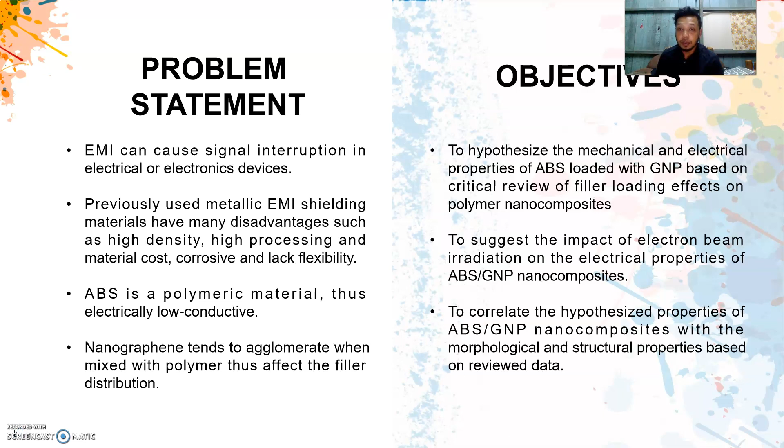Now scope. Firstly, ABS is used as a polymer matrix and graphene nanoplatelets as nanofiller. Various amounts of graphene nanoplatelets, 0.3, 0.5 and 1.0 weight percent, will be used. The samples are prepared by mixing and compounding GNP and ABS polymer using a single screw extruder to produce nanocomposite sheet. Next, the sheet will be cut into the standard specimen.

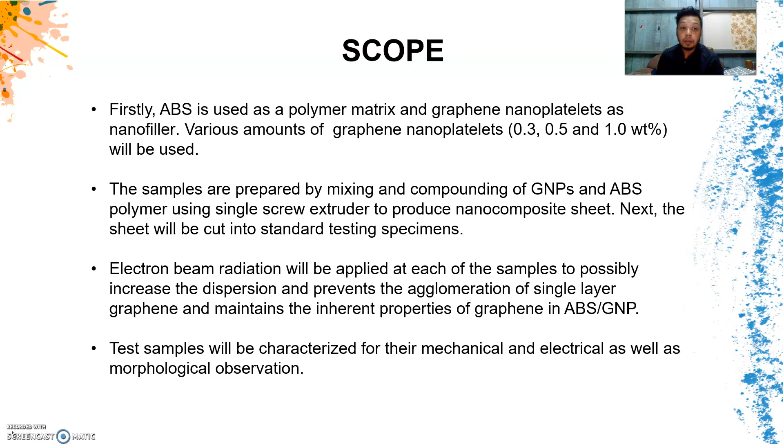After that, electron beam radiation will be applied to each sample to possibly increase the dispersion and prevent the agglomeration of single layer graphene and maintain the properties of graphene in ABS and GNP. The test samples will be characterized for their mechanical and electrical properties as well as morphology observation. For literature review, I take two journals from Mohd Bijarimi and Vidakis.

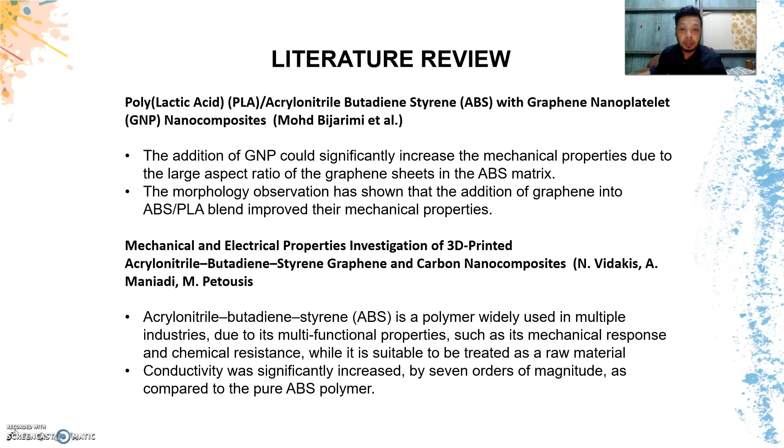Now, methodology. First, I start with mixing ABS powder and GNP powder by using a 3D mixer with speed of 60 rpm for 1 hour. After that, the mixed powder was spread on a tray and dried in the oven at 90 Celsius for 1 hour. After drying, blending was done using a single screw extruder machine with feeding zone 180 Celsius, melting zone 180 Celsius and metering pumping zone 160 Celsius.

Then we compress the composite using hot press molding to get the sheet at temperature 190 Celsius, pressed for 1 minute 30 seconds with pressure 700 psi. After that, to get the sample, the sheet will be cut to standard specimen ASTM type 4. Then test the sample using tensile test to get mechanical properties such as tensile strength, Young's modulus, and elongation percent.

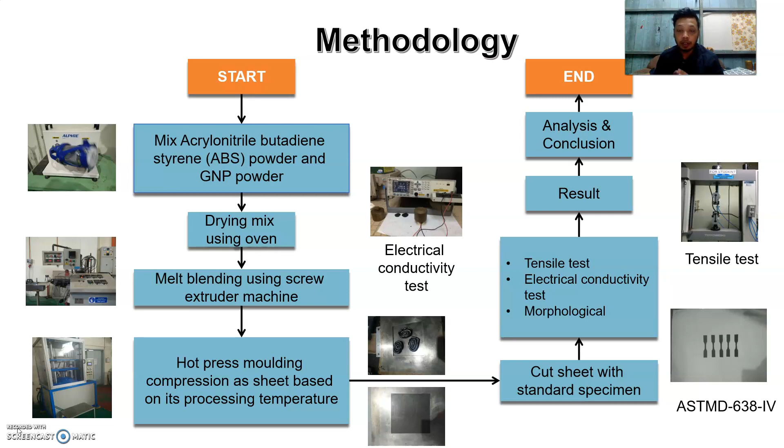For electrical properties, I use an LCR meter to test electrical conductivity. And for morphology, I use scanning electron microscopy, SEM. After that, I will get the result, and the result I will explain in the next slide. Okay, this is the formulation of the experiment of GNP-based ABS composite.

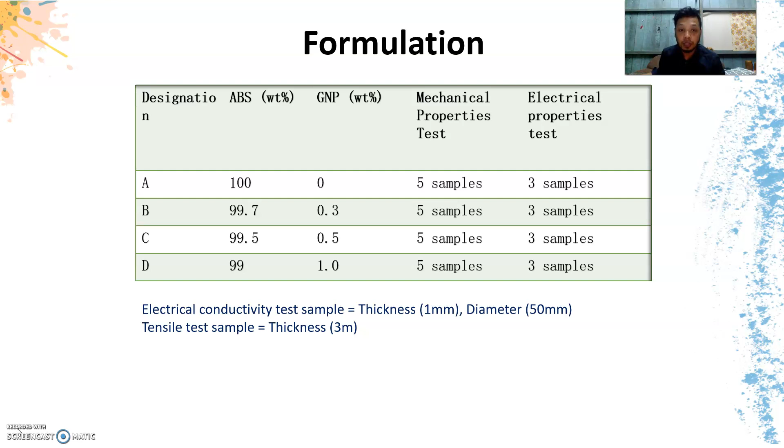As you can see, for graphene I use 0.3, 0.5 and 1.0 weight%. Okay, now I will explain my results and discussion. First, these results are projected results and outcomes based on a critical review of various previous data.

Okay, now this is the expected result for the mechanical properties for tensile strength. As you can see, the tensile strength only slightly increased at 0.3 and 0.5% GNP. As the amount of GNP is increased to 1%, tensile strength shows a decrease in value.

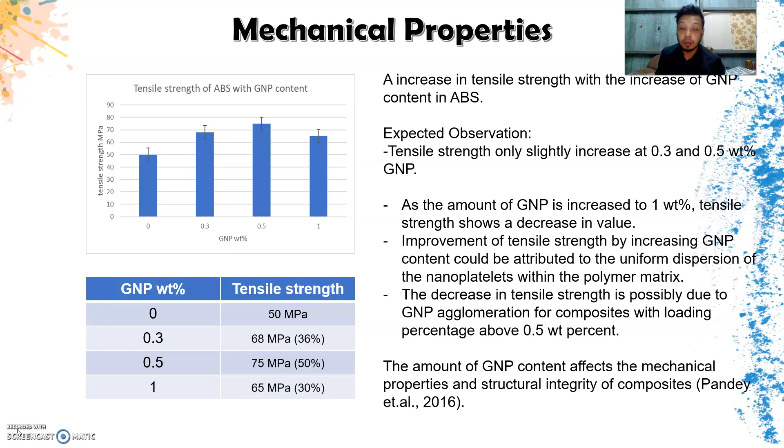The improvement of tensile strength by increased GNP content can be attributed to the uniform dispersion of the nanoplatelets within the polymer matrix, and the decrease in tensile strength is possibly due to GNP agglomeration for composites with loading percentage above 0.5 weight%. Next, we go to the expected result for percentage elongation.

As you can see, the chart pattern is increased at 0.3 and 0.5. After that, at 1.0 weight% it shows a decreased value. Elongation at break decreases with the addition of GNP. The decrease in the percentage of elongation can be attributed to the effect of GNP. The lower percentage elongation suggests a more brittle characteristic.

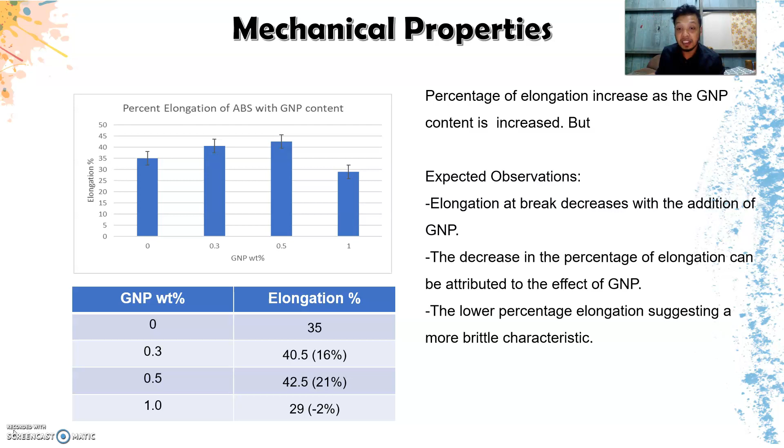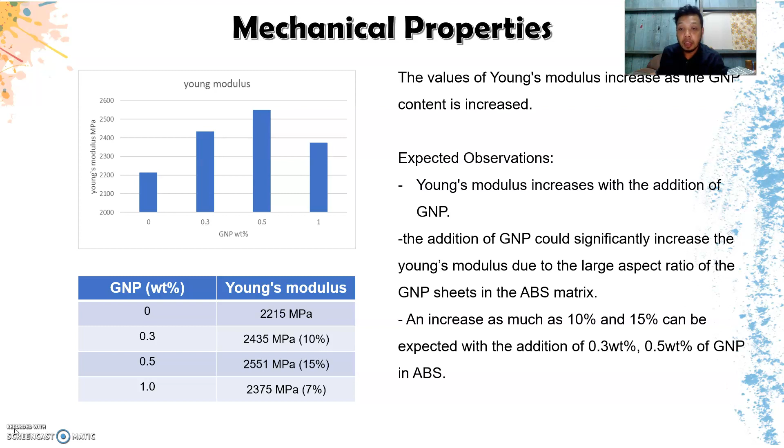The addition of GNP could significantly increase the Young's modulus due to the larger aspect ratio of the GNP sheets in the ABS matrix. Increases as much as 10% and 15% can be expected with the addition of 0.3 weight% and 0.5 weight% of GNP in ABS.

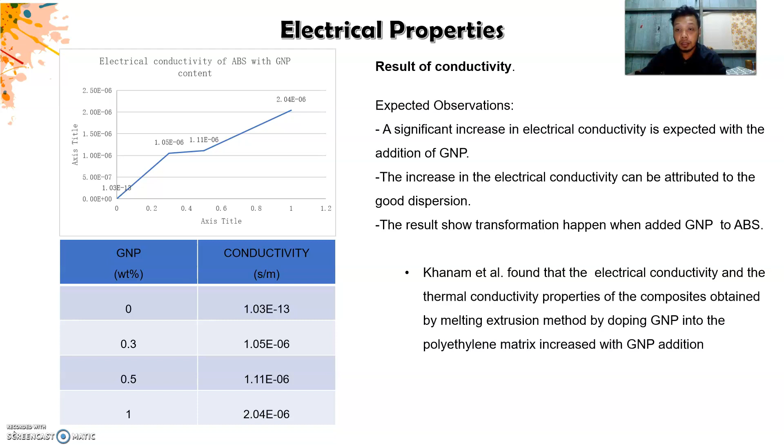Now, we go to the expected result for electrical properties. As you can see, a significant increase in electrical conductivity is expected with the addition of GNP. The increase in the electrical conductivity can be attributed to the good dispersion. The results show a transformation happens when GNP is added to ABS.

By increasing the magnitude of EB radiation on the ABS/GNP nanocomposite, it will improve the dispersion of the graphite platelets, thus achieving higher electrical conductivity. Reason: EB irradiation will reduce the agglomeration of GNP in the ABS composite and help GNP to disperse.

For morphological analysis, morphological and structural properties of ABS based on review data. It can be observed that the structure changes drastically after processing; larger polymerized domains and a smaller number of graphene agglomerations can be seen. Regions with formed polymer microfibers are present in the fracture area of the printed ABS/GNP sample, figures E and F, indicating a weak connection between graphene and polymer matrix, leading to ductile fracture of the specimen.

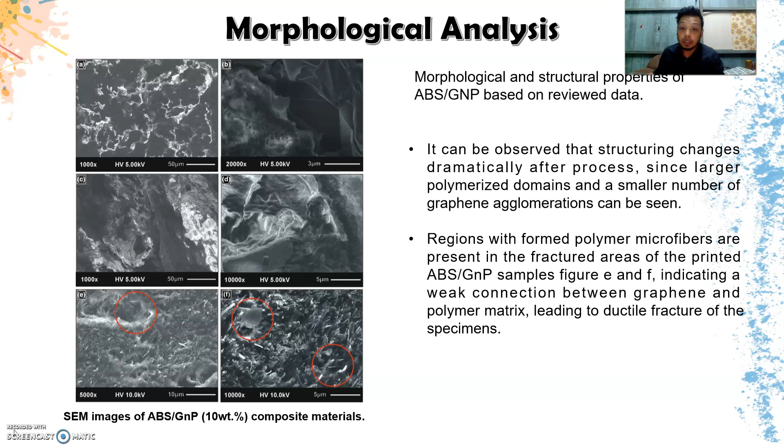Okay, for conclusion, it is suggested that the incorporation of GNP into the ABS matrix increases the mechanical strength of the polymer. Tensile strength decreases with loading percent above 0.5 weight%. Next, percentage elongation of ABS shows an increased pattern when GNP is added. The decreased percent elongation means GNP made the composite more brittle.

Besides that, electrical conductivity is significantly increased with GNP addition. The addition of large amounts of graphite greatly affects the mechanical and electrical properties of ABS. Lastly, EB irradiation is effective to improve the electrical properties in the ABS/GNP nanocomposite.

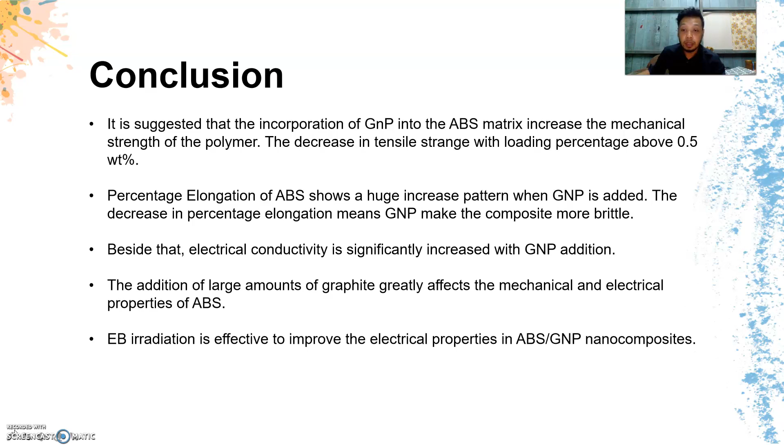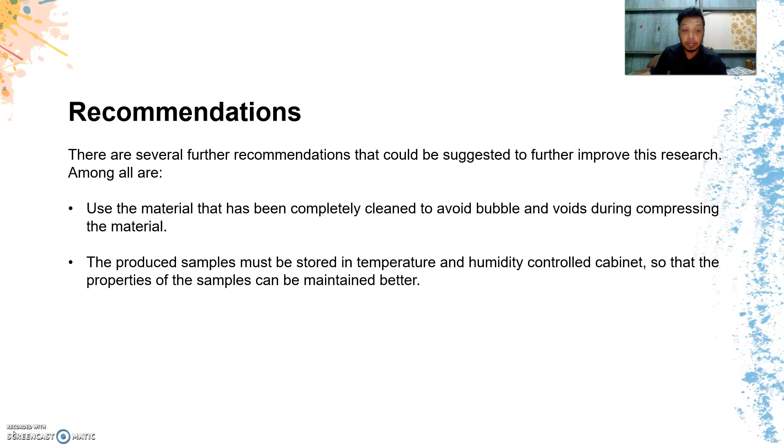Recommendation: there are several further recommendations that could be suggested to further improve this research. Use material that has been completely cleaned to avoid bubbles and voids during compressing the material. Next, the produced sample must be stored in a temperature and humidity control cabinet so that the properties of the sample can be maintained better.